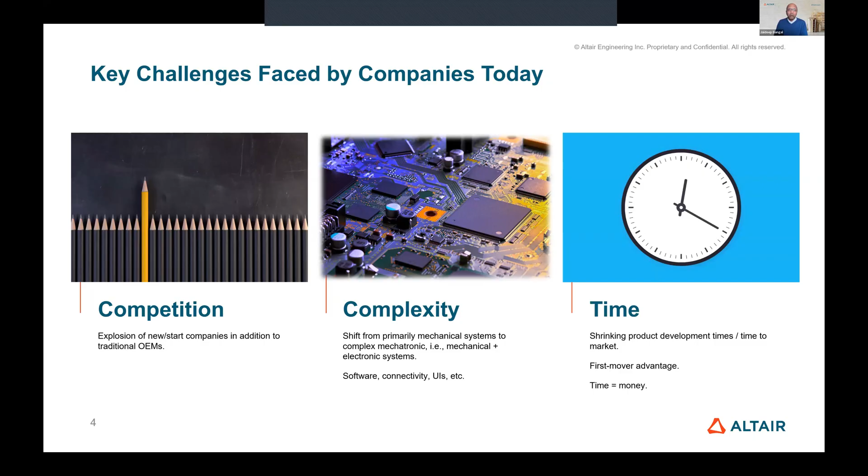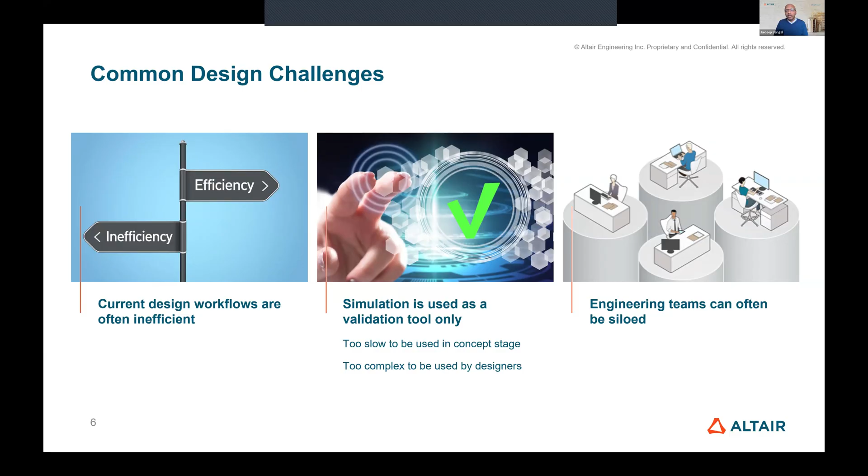Now, saying that, even the engineers face challenges. Maybe it's a design challenge, maybe it's efficiency for the design. What about simulation? When to use the simulation tools? Should I use it early in the design phase? Should I use it in the mid, or at the end of the design or product development cycle? Many engineering companies are implementing simulation tools very late. The design engineers design the part, then send it over to the CAE engineers, manufacturing engineers, to see if they can make it. They send the report back saying make those 5 changes. Is it efficient? It's not. And that's where, can I make these tools available for the design engineers, mechanical engineers, to be used very early in the design phase? That's becoming very important.

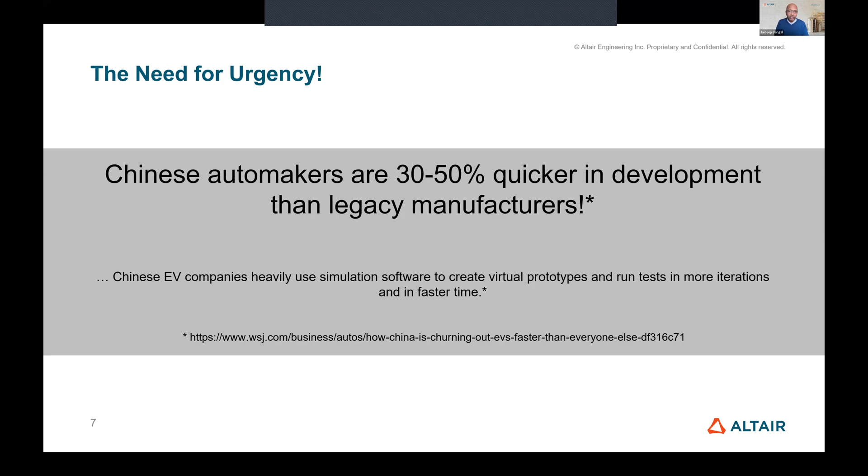Now think about this. This is a report from the Wall Street Journal, WSJ. Chinese car companies are 30 to 50% quicker, and they're becoming a threat to a lot of automotive companies here in the Americas or Europe. I mean, they're doing the right things. But a lot of those companies are our customers. We are helping them to move faster. The way they are moving faster is implementing these design tools, AI tools, manufacturing solutions very early, to predict the failures and fix those failures during the design phase.

Another example on the manufacturing side is this tool company from Asia. They were able to predict casting failures, manufacturing failures very early. They're saving almost 80% of their time, the product development cycle time and the manufacturing time.

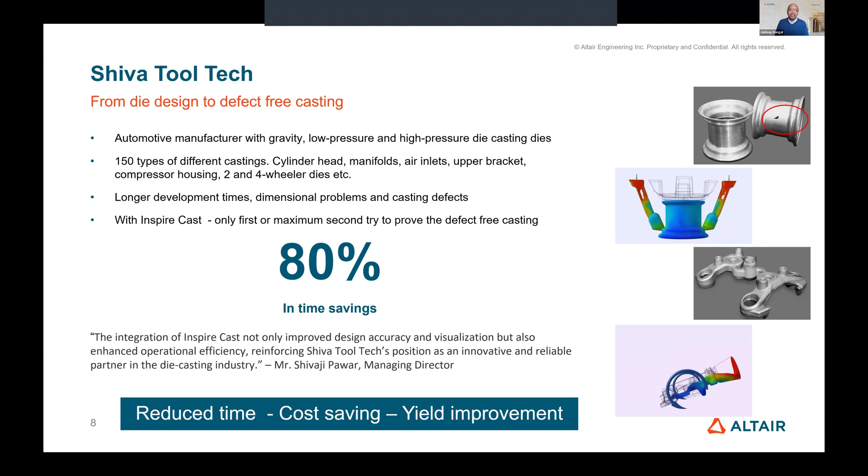This is another example from an aerospace company who wanted to redesign their part, make it lightweight, use different materials. They wanted to use a different manufacturing process, but because it has to go through FAA regulations, they cannot just change the manufacturing process or use a totally different material. So what to do? They implemented topology optimization based on the loads, loading conditions, worst case scenarios, and then they 3D printed the sand mold for this part, which they eventually cast. So they're using the best from both worlds, 3D printing and optimization, to come up with a lightweight design, but also using this traditional manufacturing process, which is proven and goes through the regulations very quickly. So with just that one part, they were able to save 3 pounds, and that's about a 65% reduction in mass.

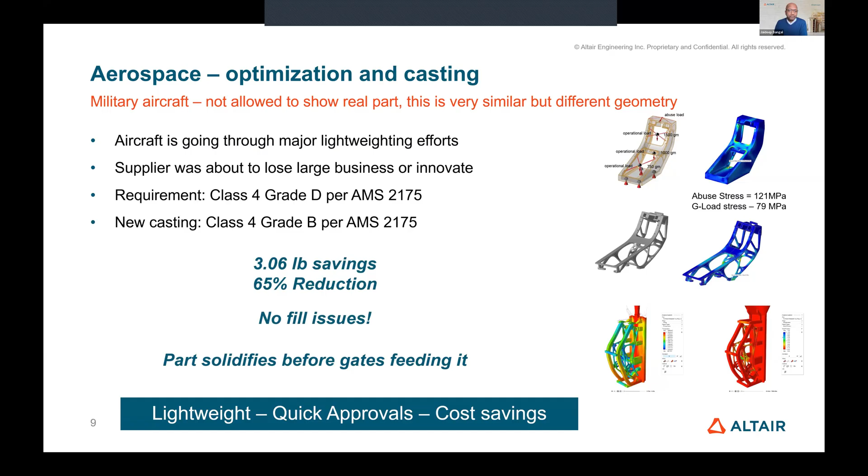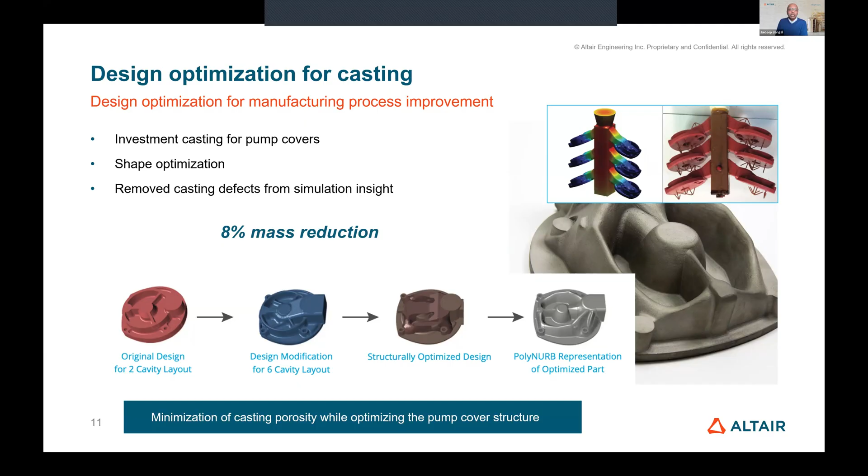Another example, maybe the last example I want to show, but I'm going to tell you now so you can get the crux of the story. It's also important to design the part for a manufacturing process. It's not just finding the defects during manufacturing, but can I predict those defects at the manufacturing level, and can I make design changes or process changes to get a successful manufacturable part. This particular design was an 8% mass reduction.

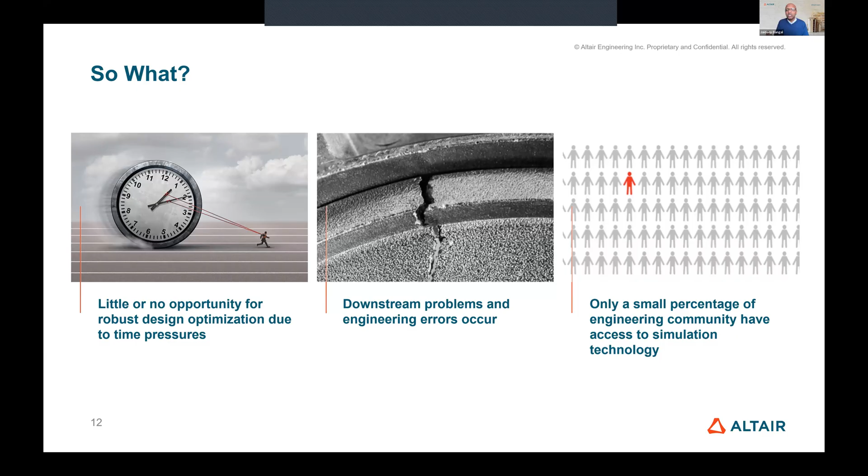But the question I always get is: all right, that looks good on paper, in a PowerPoint presentation. So what, right? My applications, my designs are different. So what we can do is start to dive deep into how it works, find the downstream problems very early. Maybe change one component, maybe start by changing one process element, and see if that benefits your application.

So what is design for manufacturing, or design to manufacturing? It's a solution. If I'm an engineer, there are two ways engineers design a part. Designing from scratch with a napkin sketch: where the forces are, where the loads are, this is my area where I want to design. The second method is very common: it's carry-over design. That design has been there for a long time, and I want to make design changes now, maybe use a different material or a different manufacturing process.

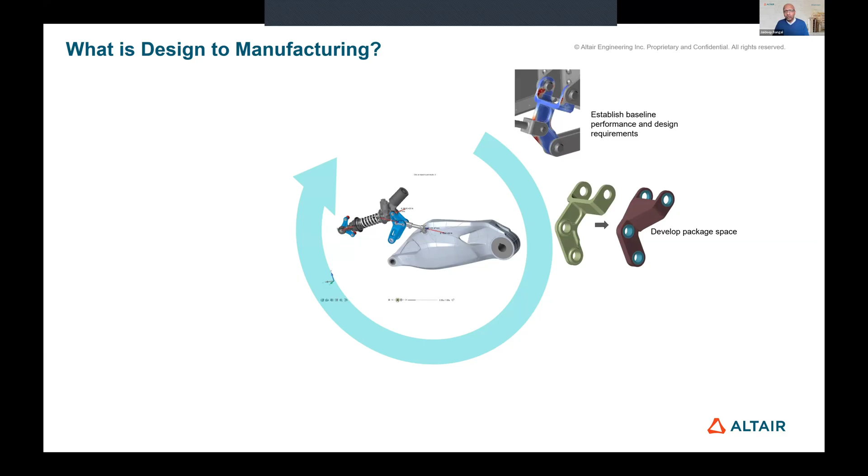So I always start with how this existing part behaves today, right? I'm going to run a quick baseline simulation. From there, I will start with the largest possible design space, the packaging space available for engineers. And then from the given loads, which can automatically be calculated or populated as load cases from a kinematic motion simulation, which you see on the screen. It's a simple motion simulation with springs and hydraulics, and this is the bracket for the Ducati Superbike. Those moments and forces are calculated on joints, pins, and force locations, and I'm going to use those as my load cases. And the tool comes up with the most optimal solution.

This is where the material needs to be, right? That's what the tool is telling me. But how am I going to manufacture this? Is it manufacturable? Maybe machining, maybe 3D printing. But even with 3D printing, it's not that easy to make that particular design we see on the screen.

At that point, we force the tool to come up with a design which is manufacturable. Maybe it's different manufacturing processes: injection molding, machining, a 5-axis mill, a 3-axis mill. Maybe it's additive manufacturing. Maybe it's casting, single draw, split draw. Maybe it's a stamped component. And depending on the manufacturing process or multiple processes I select, the tool will come up with the design, which is for casting in this particular case.

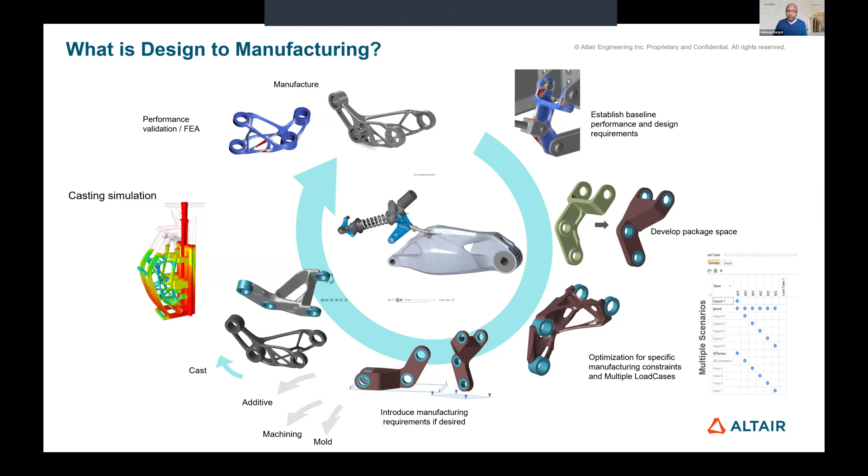But many times as engineers, we work in bits and pieces. So it's totally okay to run optimization separately, or manufacturing simulation separately, or the FE analysis separately. You can bring in the part from somewhere else and just run the manufacturing simulation to check what will happen if I make this part. So this is, in an ideal world, the entire end-to-end solution, which can be used in bits and pieces.

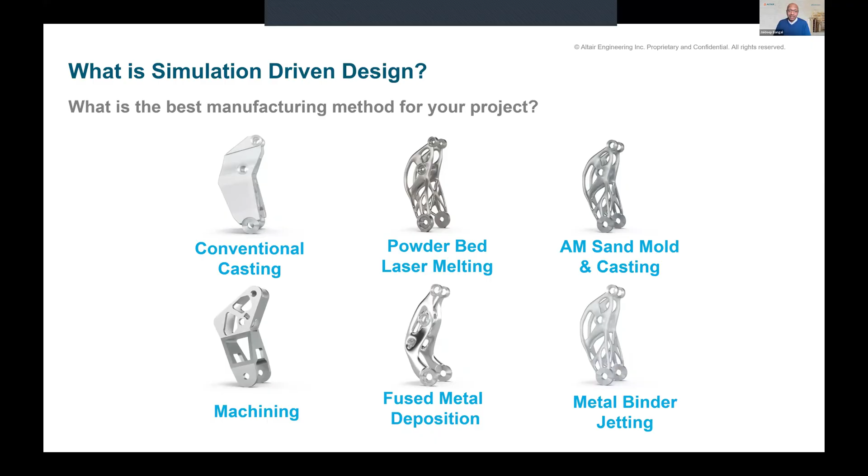So this is a good example of what smart design is, right? What is simulation-driven design? The same exact bracket designed for different manufacturing processes, from conventional single draw casting to powder bed laser melting with additive manufacturing, or maybe a hybrid method where I get the sand mold 3D printed and use casting as the manufacturing process, or I can go with machining, right? A 3-axis, 5-axis, or 9-axis mill, and come up with a design. So the same bracket can be designed and its manufacturability checked within a single solution.

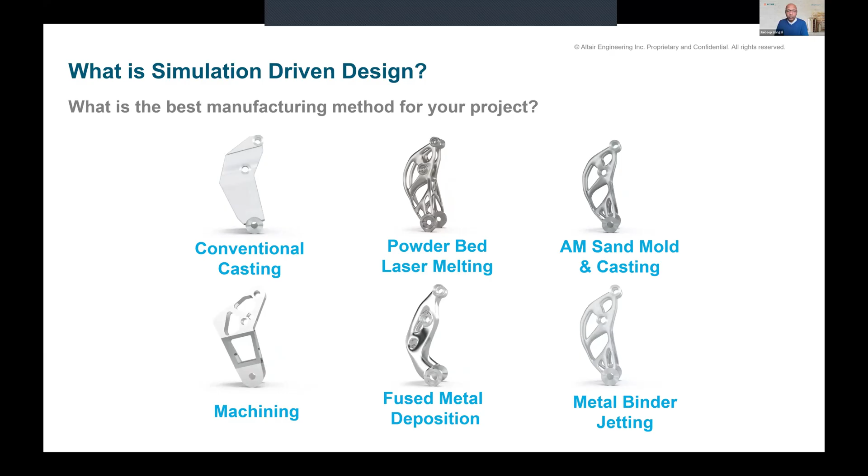To achieve that, there are different manufacturing simulation techniques or solutions, from metal casting, metal forming, injection molding, extrusion, both for metal and polymer, additive manufacturing, and polyurethane foaming. Again, these are for design engineers, mechanical engineers to be used very early in the design product development phase.

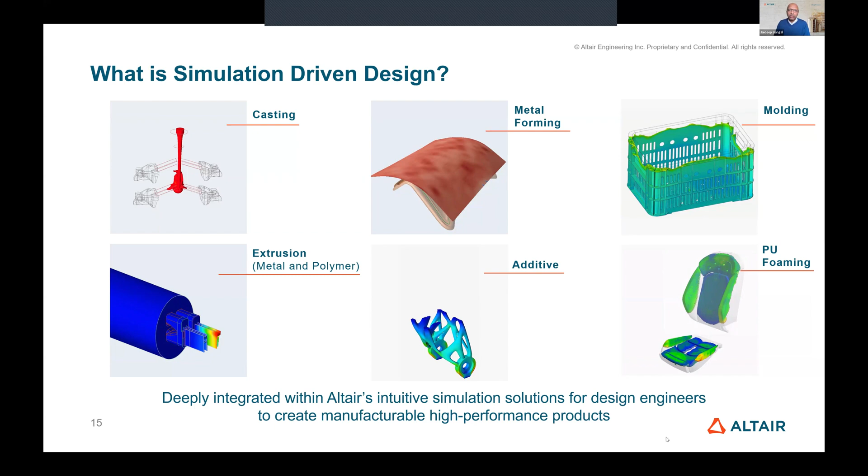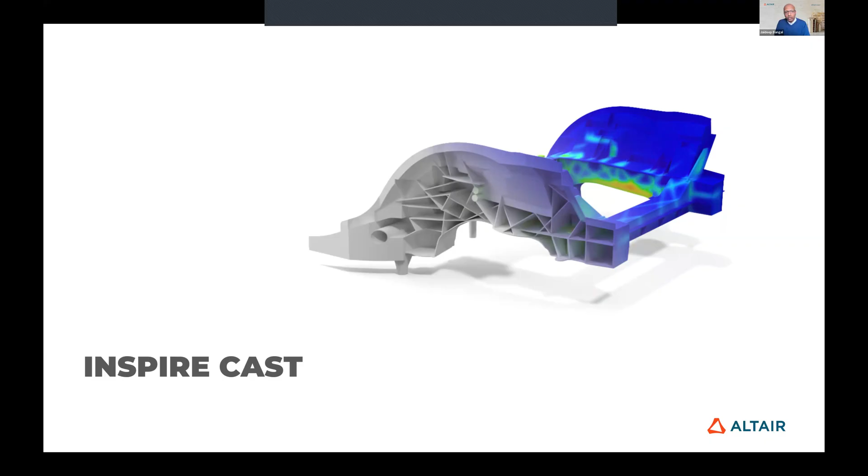Now, I'm going to start diving a little bit deeper into the discussion today on manufacturing solutions. Until now, we saw how design optimization, topology optimization can come up with designs which are manufacturable. But what are these manufacturing feasibility tools? Let's start diving into Inspire Cast, which is our casting solution. It's a complete casting solution from filling analysis to cooling, cycling, and warpage. It is temperature coupled.

That means we are running both flow for the molten metal and the temperature for the entire system. It can be die, it can be tooling, and it also can have the cooling lines you can see on the screen. I think there's a video. Let's play that video. And when it comes to the cooling or the solidification part, Inspire will start coming up with the results for the porosities, hotspots. We can run the tooling analysis. We can run the cooling optimization. At the end, when we run the warpage analysis, it can come up with the deformation and the residual stresses, which, by the way, can be used for structural analysis.

So as an engineer, I also want to know, if I manufacture this part and use it in my final assemblies, how it is going to perform, what kind of material properties I will get. So we can export these deformation or residual stress results for structural analysis. Many of our companies do this for crash or drop tests to see how this cast part will perform in the real assembly.

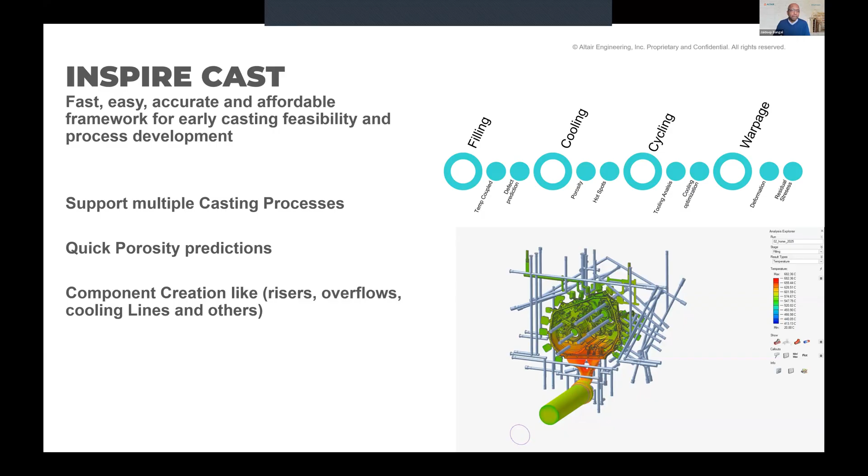So there are two ways the casting solution is being used. One is very early by the designers during the product development phase, coming up with the design in a few minutes, a few seconds rather. I want to find out the porosities. I want a quick preview of where the porosity will be. I want to run a quick thickness analysis. The rib structure: you have 1 millimeter, 2 millimeter ribs. What will happen? Or the draft angles for the mold opening. 1 or 3 degrees are very common draft angles in the casting world. We can run quick analysis on those.

At the later stage, we can run a complete CAE or manufacturing simulation for the entire part, where we can start adding more components in the casting process, such as cores, chills, risers, sleeves, overflows, and all that stuff. Or you can bring all those parts from an external setup as well. So you're working with the foundry, and they have all this setup done for your parts, but you want to really quickly check what will happen when we actually start pouring the metal.

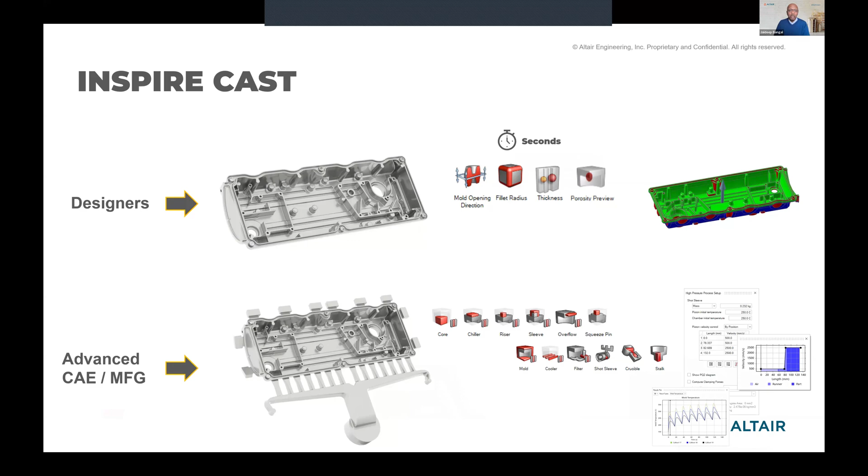So before we actually start spending time on the tools, dies, and metal on the foundry side, we can identify the problems. On the design side, these are the very typical workflow processes. You can see the porosity preview; that's where we can identify the areas where the porosity might be.

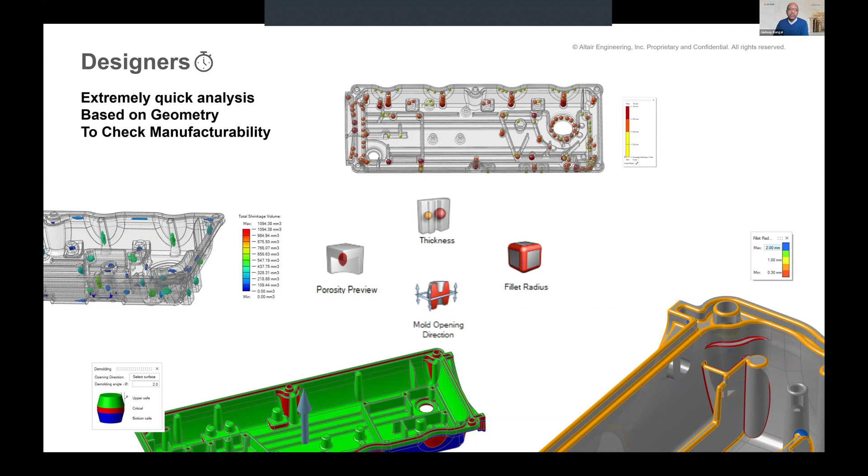So there are two options as a design engineer. I can go back, make design changes to take that porosity out of the part or avoid the porosity, or I can start using, for example, risers to take that porosity out of the part.

On the advanced analysis side, there are four different processes that Inspire Cast supports: HPDC, high pressure die casting, low pressure die casting, gravity, tilt pouring, sand casting, investment casting. These are the very typical casting processes.

You don't have to be the expert in casting, or a manufacturing person all the time, to use these tools. It's a very easy to use tool. If you happen to use Inspire, you can watch some videos for 2 hours or half a day, or go through a quick training session online and start using these two solutions.

I think the most difficult part for anyone is understanding some of these results and implementing them back into their own design, and that's where Team D3 and we as Altair can come into the picture, kind of hold your hands, help you, and go through your first few projects.

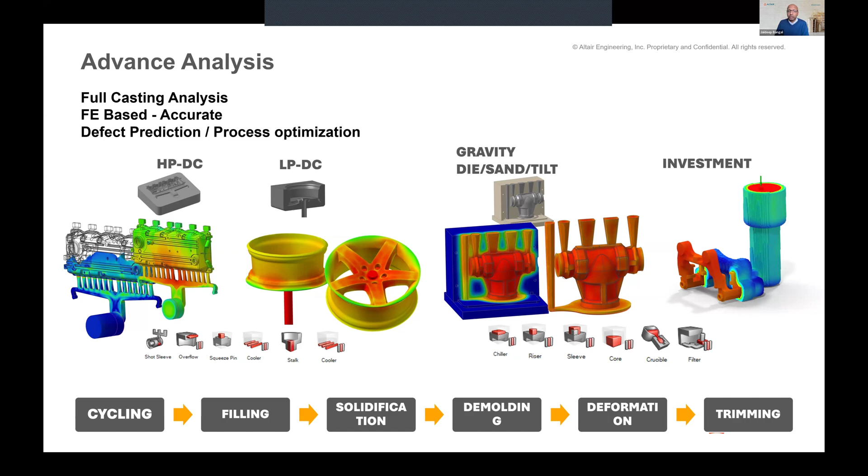Now, the second part is Inspire Mold, which is our injection molding tool. It's a complete injection molding tool based on the Inspire platform. Again, it does a filling, packing, cooling, and warpage analysis. For the filling, we can identify the flow patterns. You can get the temperature flow front for the part.

Once you start packing, find out the sink marks, right? Or in the cooling solidification part, find out the weld lines of the mold, or the cycle analysis for the mold. And at the end, use the complete warpage analysis with fibers to understand the deformation. And again, we can take this data back to the structural analysis if we need the material properties.

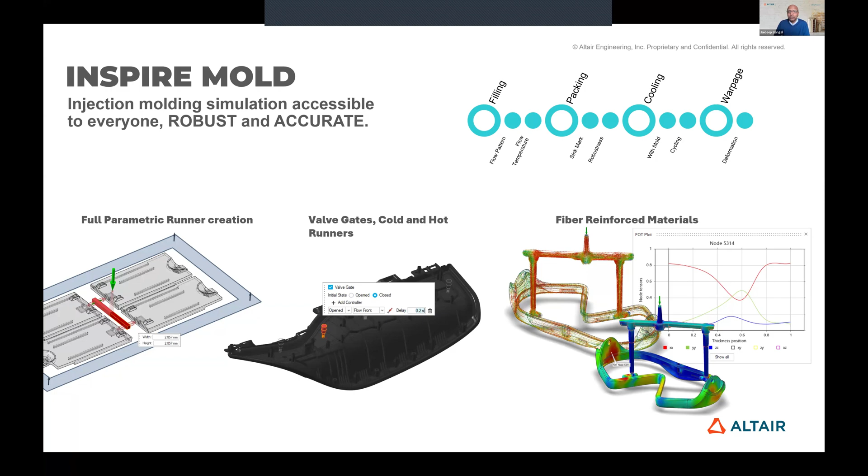Now, it's what we call a hybrid solver. It runs super fast. The way the solver is based, it needs very little mesh. As engineers, I don't want to spend time setting up or meshing these parts. I want to take my part, set it up as quickly as possible, run the simulation and try to understand what these simulations mean, what these red colors or blue colors are telling me. That's where I want to spend more and more of my time, right?

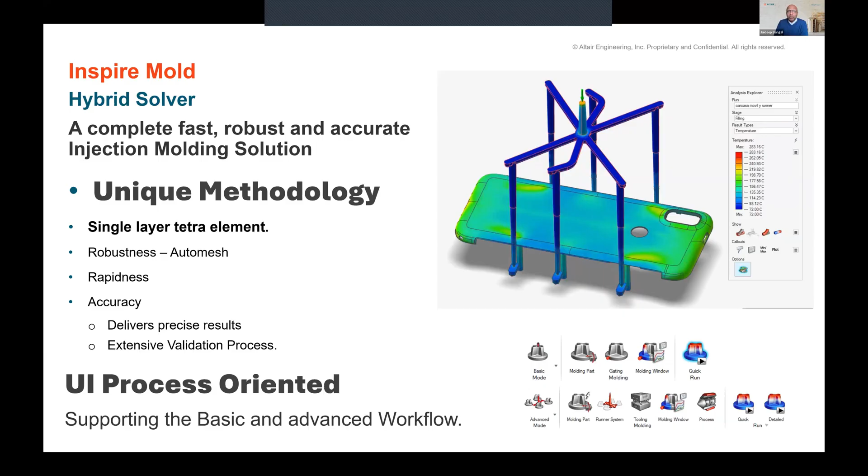So we have complete automation done for the injection molding. It's very fast and it's very accurate. Now, there are two modes even in Inspire Mold. As you can see, there's a basic mode for design engineers to quickly run simulations, or once the design is finalized, go to the next step with the advanced mode, where you can start adding more and more components. For example, runner systems or tooling, quickly check the molding window, or start adding more process parameters and run the complete detailed simulation from filling, cooling, warpage analysis with fibers on my part.

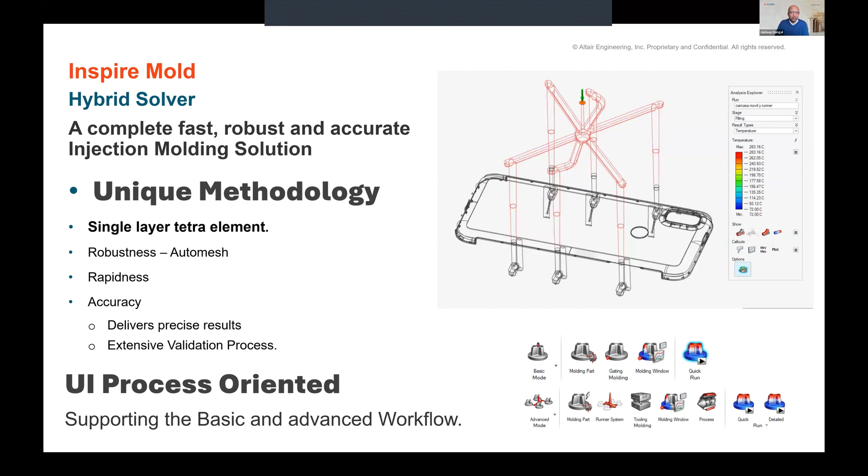So you can see it depends. The same engineer, same designer can be using these tools either very early or once the part is finalized. The same exact tool works in both ways. And another thing you can notice: from Inspire Cast to Inspire Mold, the workflow looks very much the same, from the icons to the buttons. So the learning curve is very short for all these manufacturing solutions.

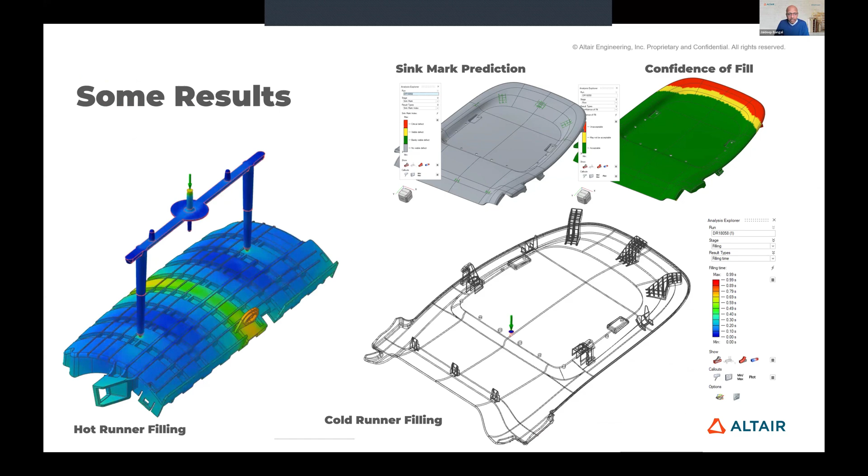Now, to quickly show some of the results that we can get from the injection molding analysis, we can go into the hot runner filling system, cold runner filling system, get the sink mark predictions, and confidence level for the fill. It goes from 0 to 1, and that's the level. Imagine it like a percentage level. 1 is good, but about 0 is bad.

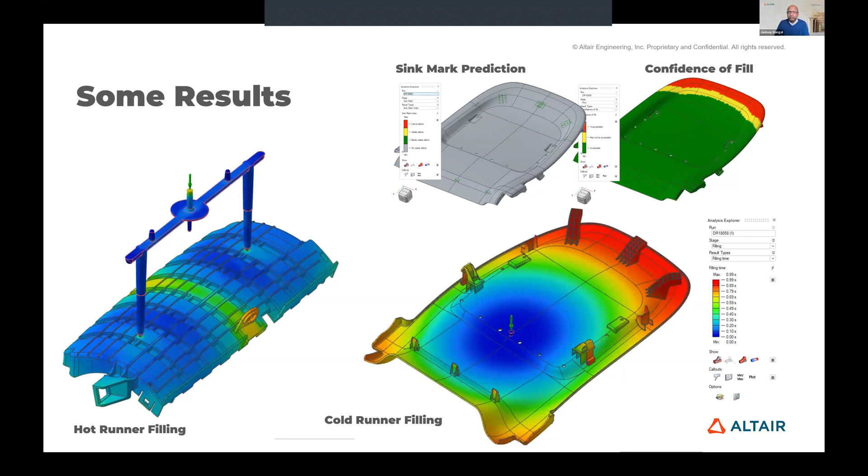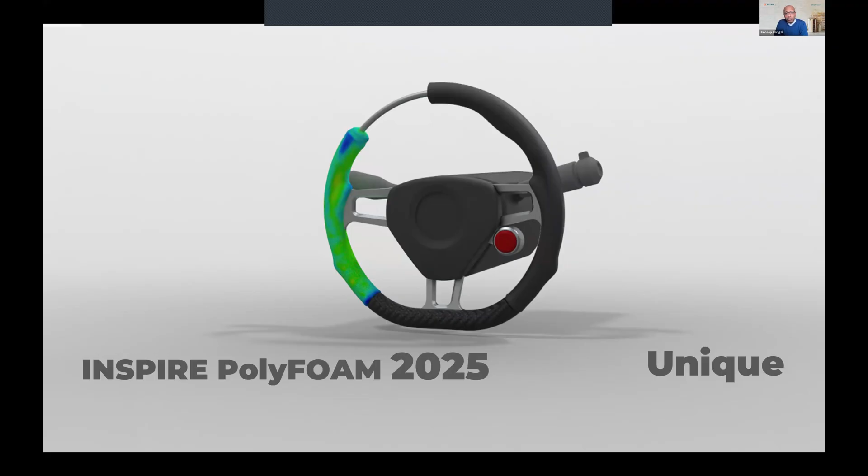Now, the next tool I want to talk a little bit about is Inspire PolyFoam. We all use cars, right? We sit in our driver's seat and it feels nice and comfortable in our own kingdom. Those car seats, and we hold steering wheels. We have a nice dashboard in the front. We have nice side panels on our doors. Those are all made from polyurethane foam, and that's what we interact with daily.

Now let's take the example of the car seat I mentioned. Right, the car seat has multiple purposes. Of course, comfort for the driver and passengers in the car, but it's also for safety. In case of a crash or a side impact, it has to absorb some of that energy.

Right, now the polyurethane foam acts as a cushioning, or the foam in that effect, in those cases. So we can predict all that analysis. Now, the way the polyurethane foam works, let me give another example, very easy to understand. In our homes, we have an insulation material between the walls. We spray this polyurethane liquid and then it kind of solidifies in a few minutes or a few seconds, right?

That is polyurethane foam. Now, the most important part, you don't want to spray too much, otherwise you'll start getting bulging in some areas. You don't want to have air pockets in those. You don't want to put too little as well, because otherwise you get pockets and bad insulation in that case. That's exactly what this polyurethane foaming simulation does. A complete filling, foaming, and curing analysis. Many components in the car, many components in refrigeration units are using this.

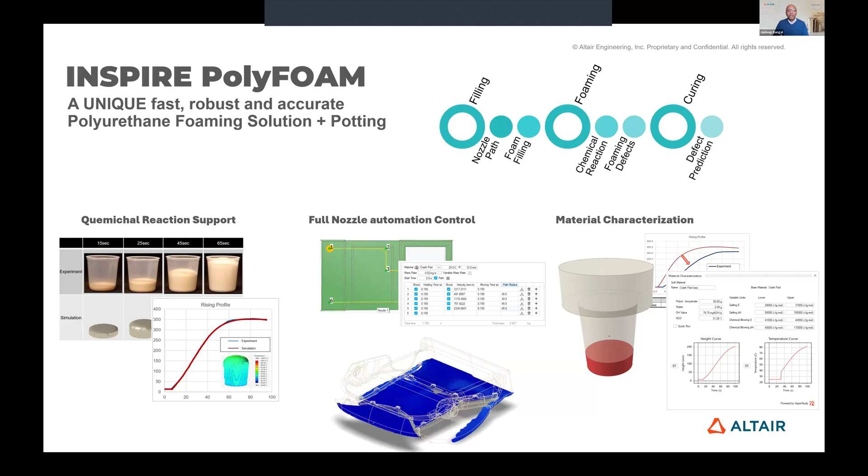The next application is electronics. In the electronics world, they call it potting analysis. You are adding some material on the electronics assembly components over the PCB board, so it doesn't shake. Good insulation. We can also simulate that entire component.

Another part of that is material characterization. The way the materials are built for polyurethane is mixing two different chemicals. That entire process can be simulated using AI tools within the tool. In the past, someone had to go to the lab, mix the materials, try it out, and see if it works. Now that process can be automated using this AI-based material characterization tool as a part of the polyurethane solution.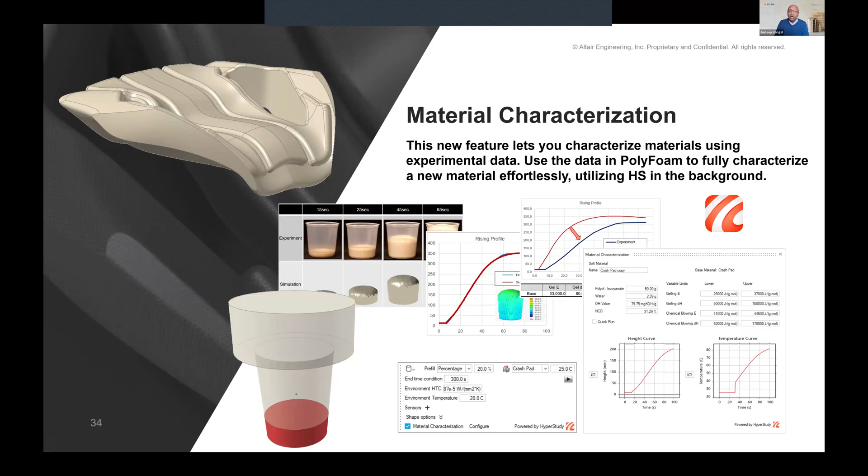A few examples where it is being used. As you can see, refrigerators are a really good application to start with. All the insulations, I would say 9 out of 10 refrigerator companies are using polyurethane foam, Inspire PolyFoam, as their tool for the solution. PCB potting is another area for the polyurethane foaming solution.

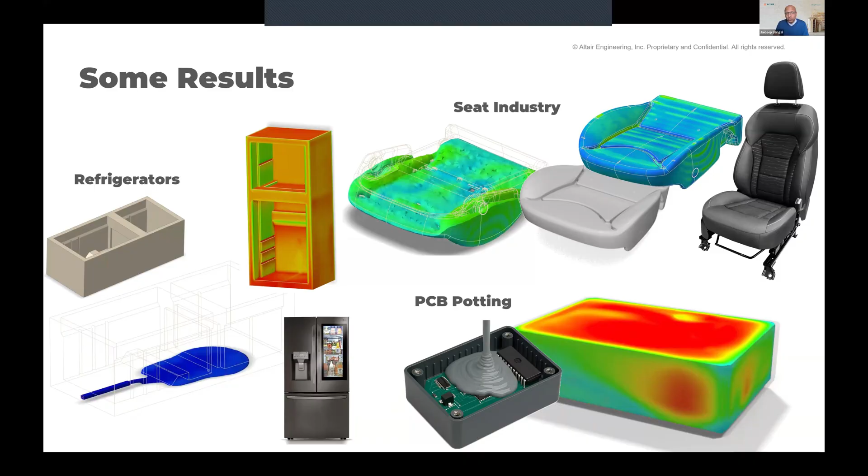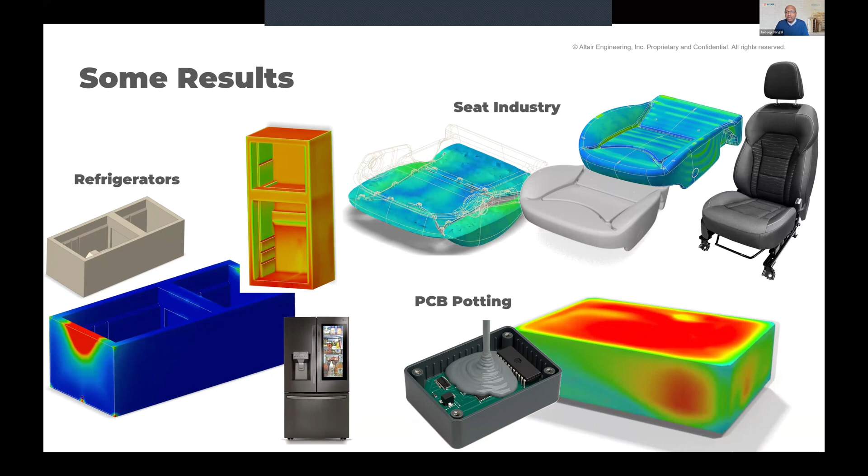You can see you put the potting material in, it solidifies, it rises. Now, the most important part is you don't want to add too much or too little. Too much means you're going to create a lot of stress on the components. How much material to add, where to add that material, how to spray that material can all be simulated using a polyurethane foaming solution. Same thing in the seat industry, right? Or the automotive industry is important for that part.

The next tool I want to talk about is Inspire Form. It's our complete metal forming simulation tool, from feasibility analysis to die design to tryout. When we talk about feasibility, that is very early design. As a design engineer, I have a component in mind I want to manufacture with stamping, right? I can run a quick feasibility simulation, we call it one step simulation, a couple of button clicks, and it will come up with the analysis for the formability defects.

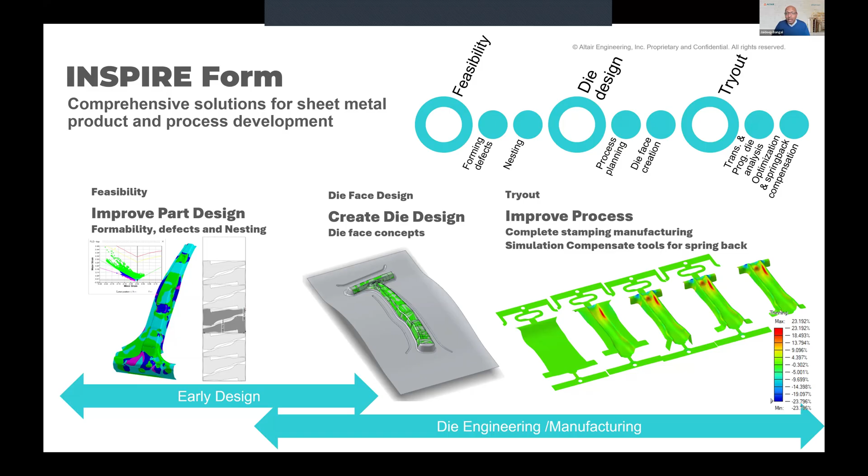We can try the nesting, and then we can go to the next steps, adding a little more complexity to the setup, from creating a die design to understand the springback, or you want to improve the process parameters for the tryout with complete progressive dies, optimization, or compensation. With compensation, at the end of the process we may get a deformed part. How can we avoid the deformation? Can I pre-compensate that part?

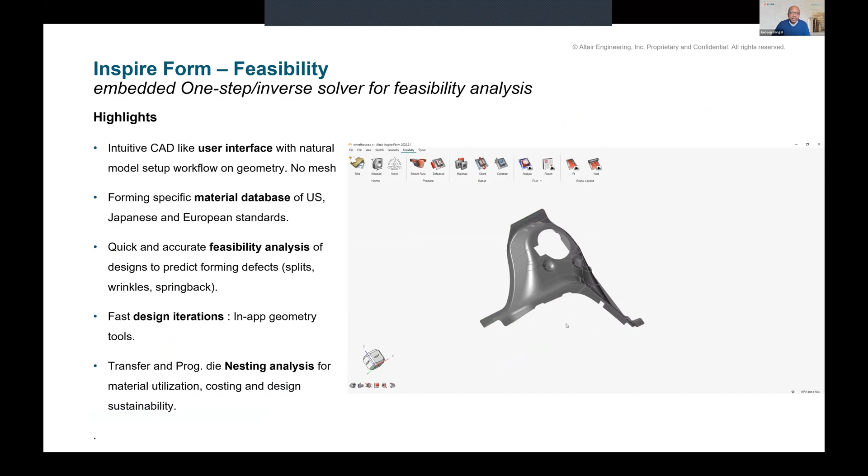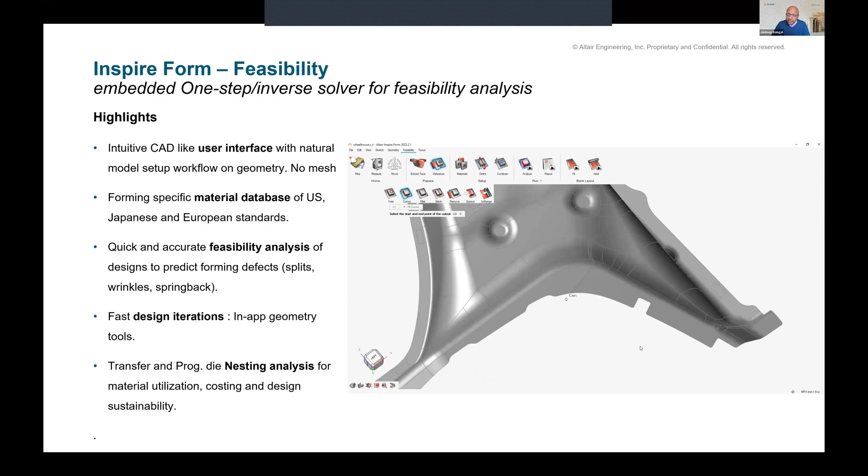This is a good example of one step or the feasibility check. I have this component. I'm just selecting the different surfaces on that component, also defining my typical holes, or just cleaning up the geometries. There are different geometry cleanup tools within the Inspire portfolio. It's not a CAD tool, but it has CAD-like features which can be used to modify the geometry

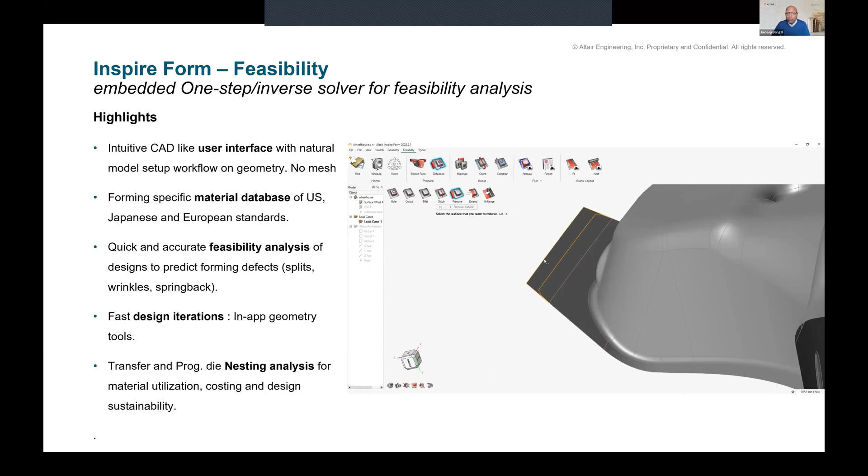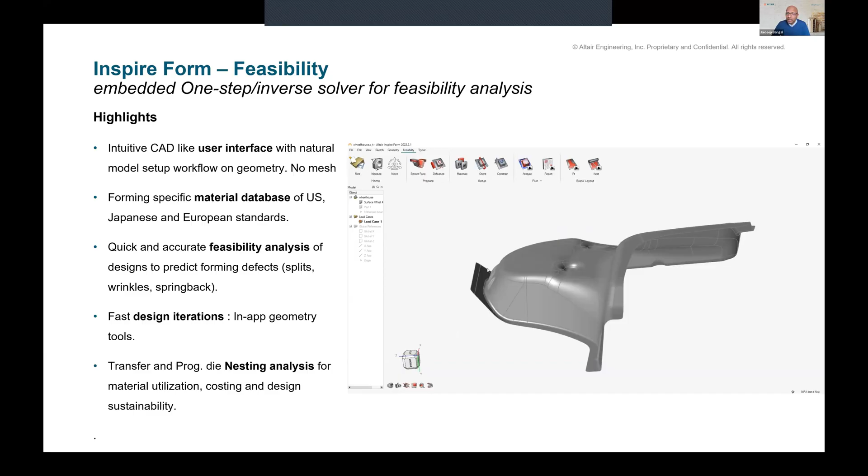or run some DOE analysis. Quickly check, I have a hole from 1 millimeter to 10 millimeters. What's the best shape or size for that hole, depending on my design criteria? That entire study can be run in the background using Inspire DOE studies.

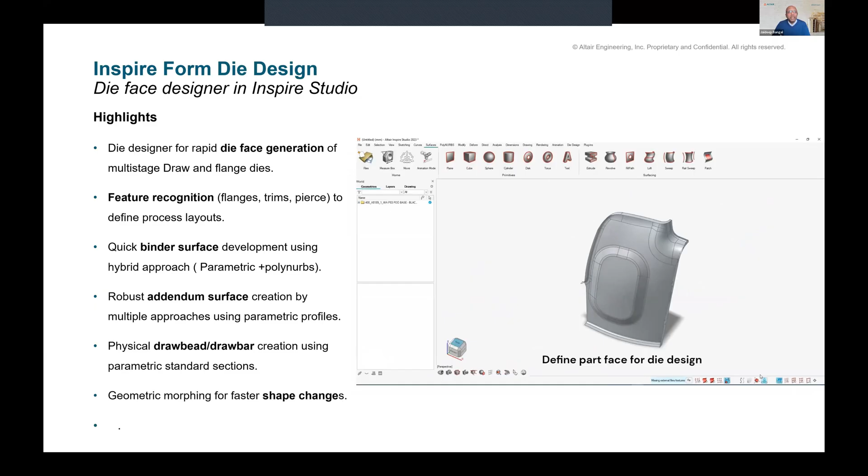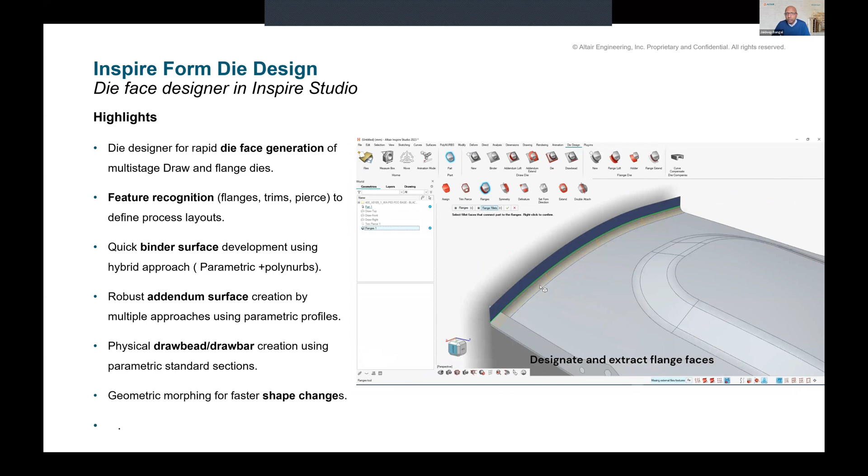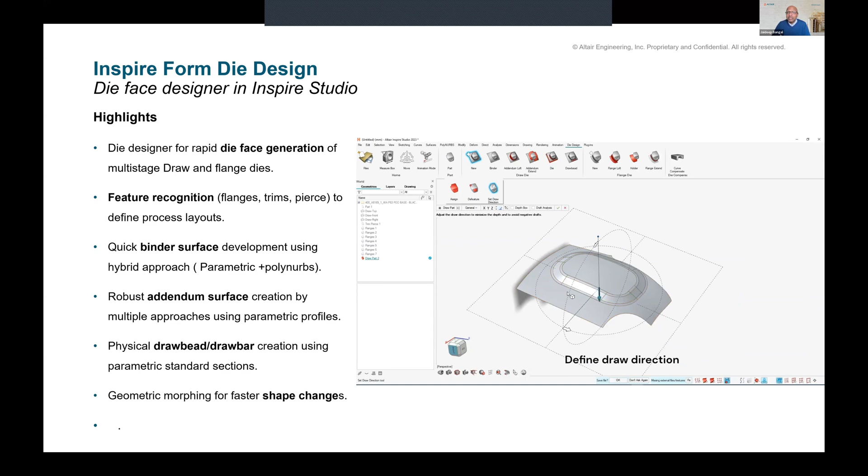The next step is my complete die face design, where we have a component. Now I'm assigning the die design component. So we're defining the trim faces here. We define the flanges. If there's a symmetry, we can take advantage of the symmetry of the part, not in this particular case. And then we need to defeature some of the holes or the rivets or the chamfers. We can remove those faces. And finally, we can start setting up the die for the die design.

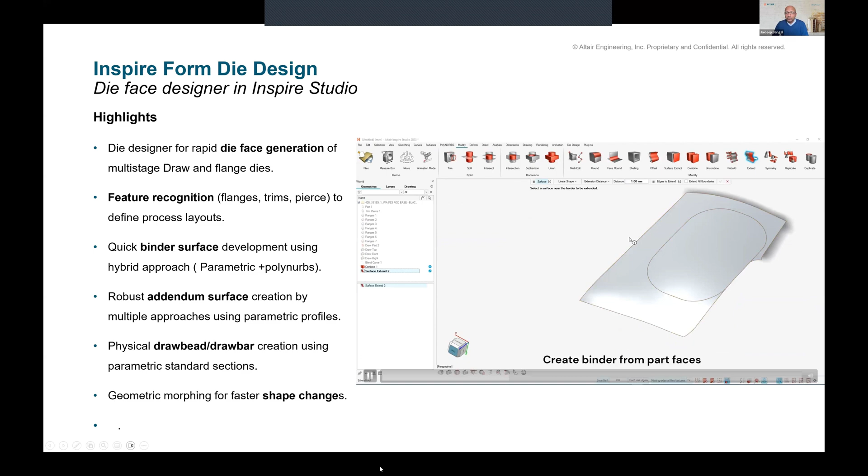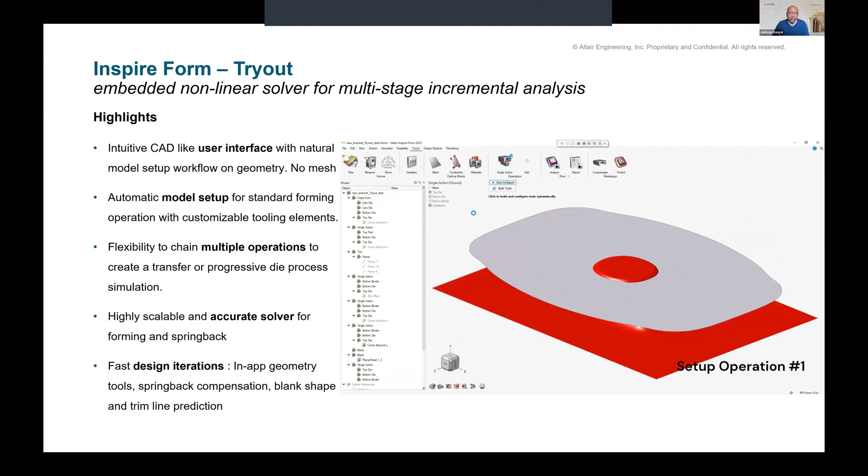The next step is a complete tryout, setting up the entire setup for my progressive die. Starting with, again, you can see from the user interface, it's a left to right or top down approach. Start with the blank phase. We define the blanks, we define the constraint, define materials, and then it's a single action or multiple action die, and we start adding more and more of those process parameters for the simulation.

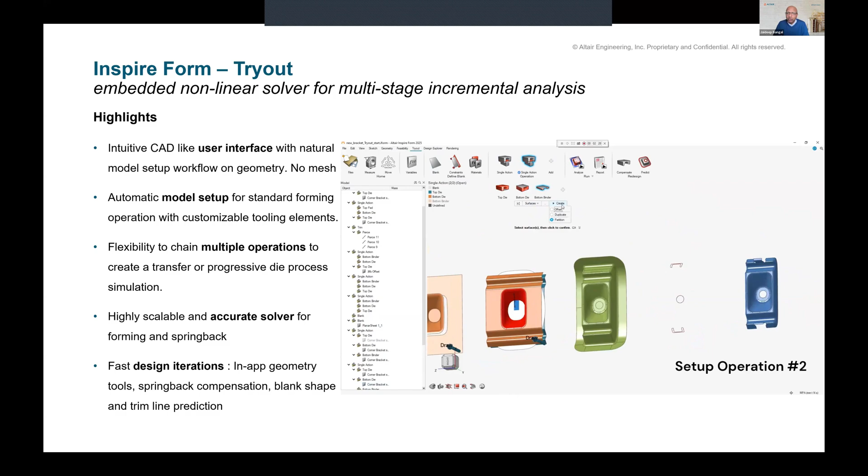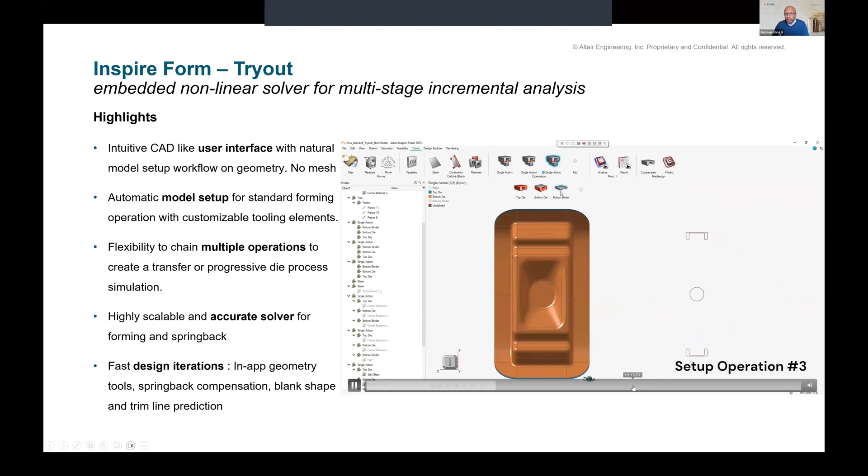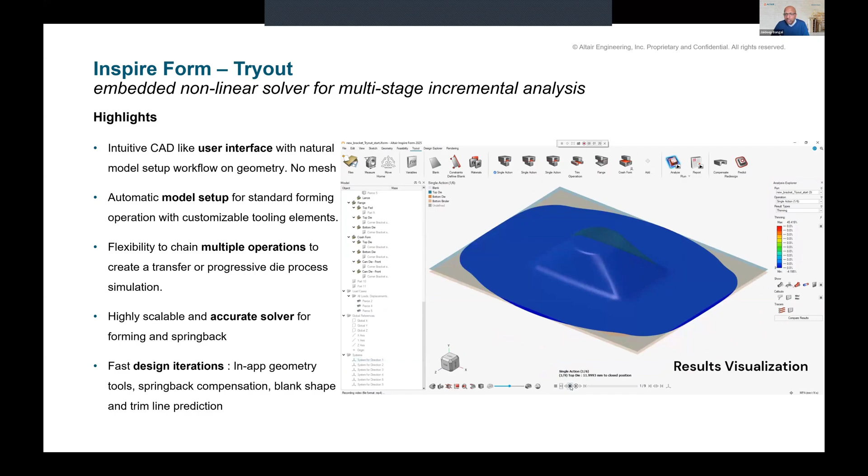Make it run a little bit faster. Once my die is set up, I can quickly run analysis. Now look, getting into the result visualization. It's a single action die I set up, so we can look into the formability, the thinning, the wrinkles. If you want to find out, all that we can find out using Inspire Form.

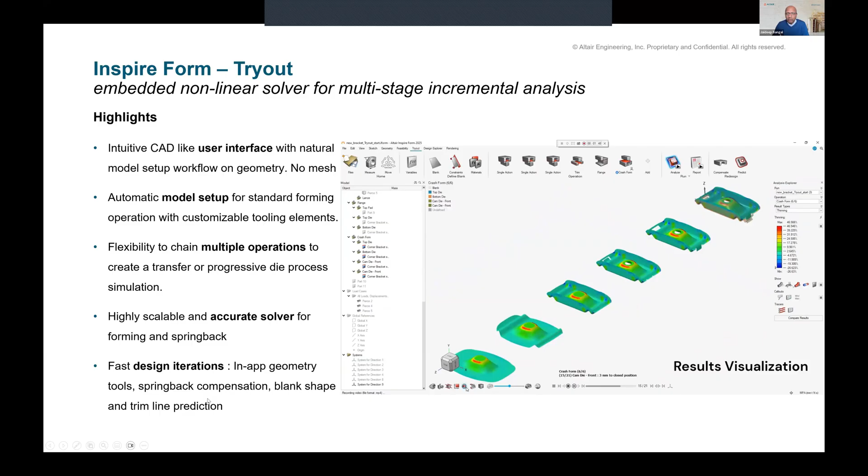Now, another reason why we call Inspire a platform, and all these tools are part of the Inspire platform, is it's not just running one particular design or coming up with a design or manufacturing, right? It has to be kind of a connected workflow. So imagine this is my oil pan. I start with the topography optimization, right? It's still a sheet metal part.

So I want to find out what rib structure I can use, and it depends on my loads, in this case oil pan, or it can be modal analysis. The tool will tell me how the rib structure should look. And from there, I come up with the most optimal design and run a quick feasibility check for the oil pan. And once I'm satisfied with the design, I go to the next level of creating the actual die using the Inspire Die Designer.

From there, I can run a complete tryout simulation on my oil pan, FLD plots, time history plots, thinning. If I'm happy with it, now I go to the next step where I'm actually working on the die side. This die will be cast, so I can run a quick casting simulation on my die to see what kind of densities I will get, if I'm going to get porosities or defects on my die design. And if there are, in this case, I use 3 risers to take the porosity out of my die, which is manufacturable.

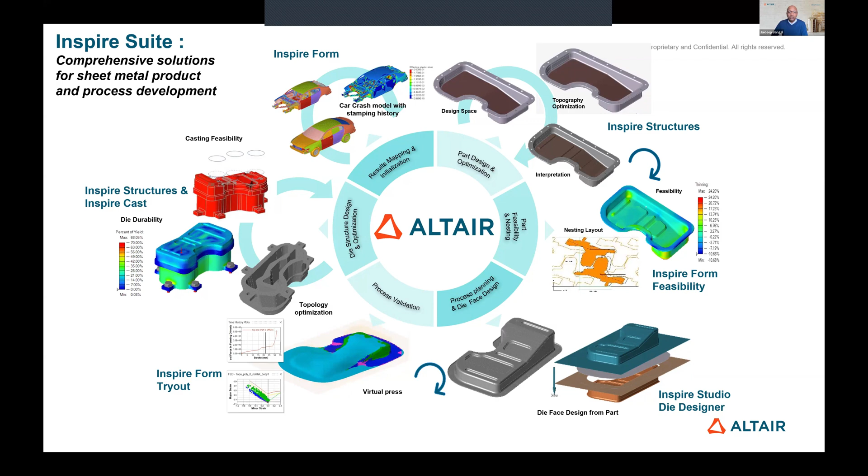And finally, take the designs for the next step of the entire simulation. For this oil pan, I want to put that into my car model for the crash analysis. And we can export that data for structural analysis, crash analysis. In this case, it can be Radioss or OptiStruct, which is another set of Altair solutions.

The next one I want to talk about is Inspire Extrude. It's the metal extrusion and the polymer extrusion process. On the metal extrude side, there are simulations to predict or analyze the nose cone. It can be both steady state as well as transient analysis. We can learn about the die filling. It can be single cycle, multiple cycle solutions. It can also run the stress analysis for the tools.

There's a solution called SimSolid. It's a meshless technology that we implemented within Inspire. So with very complex geometries and forms, you still don't have to mesh them to run structural analysis on those parts. The next is a quenching analysis, run for the part. It can be elastoplastic analysis. We can work on the grain size or the quench factor for the quenching simulation.

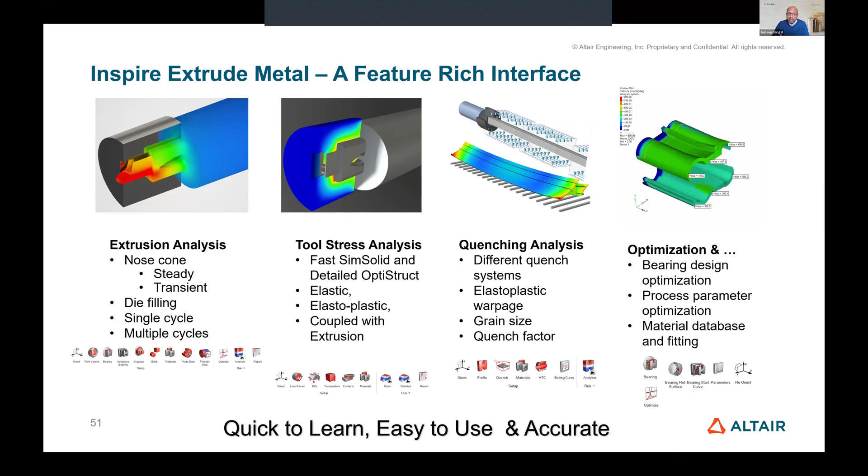And finally, optimization: the die optimization or the bearing design optimization can be done as a part of the metal extrude simulation. I think let's go back and talk about some of the applications, the defects that it can predict. It can predict the profile distortion, unbalanced bearing wear, die wear.

It can also detect the weld defects when you get this kind of unmatched flow for the material coming out of the die. It can find the seam weld issues. It can predict the grain structure, overheating and the profile quality at the end. It's the surface quality prediction. We can export the complete report of the die in this particular case.

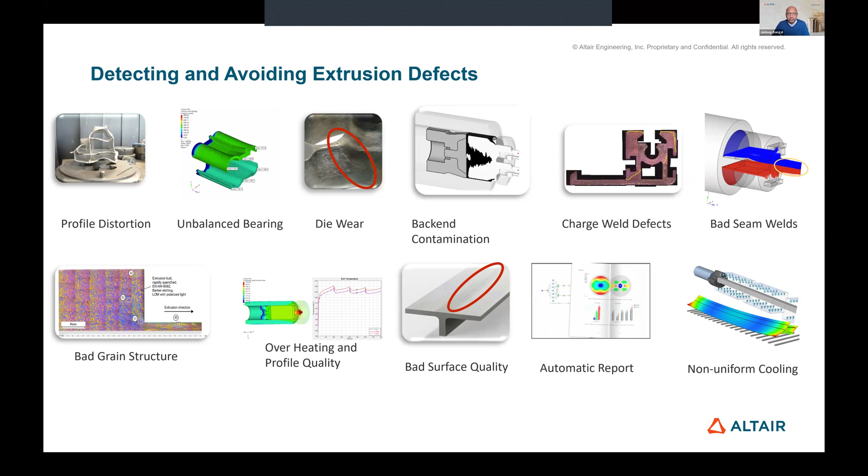The next one is polymer, for Inspire Extrude for polymer extrusion. Very similarly, it runs the analysis for single profile extrusion, co-extrusion, and it can have inserts for the prediction. Now on the prediction side, we're talking about the swelling effects, profile distortion. You can look at the material interface, very similar to metal, where we talk about weld seam lines. And also do the pressure or temperature residence time analysis, which can be exported for the structural analysis.

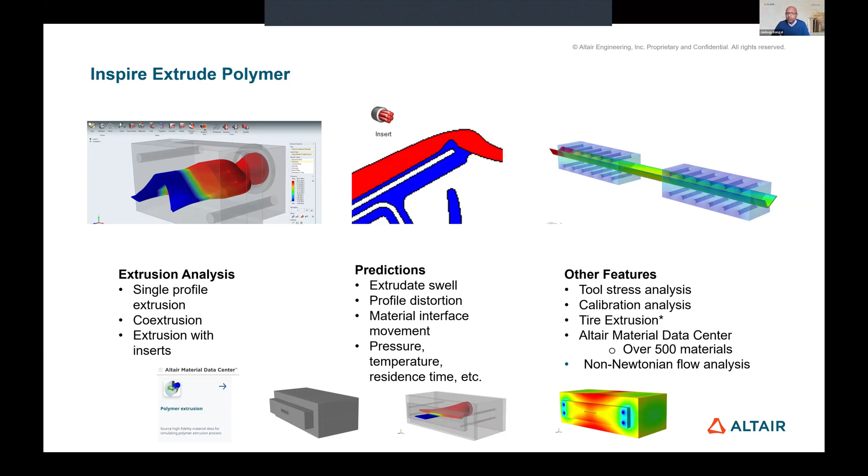All right. Now, this is all great, right? We talked about Inspire Cast for casting simulation, Inspire Mold for injection molding simulation, Inspire Form for stamping and forming analysis, Inspire Extrude for our metal and polymer extrusion. One thing I also want to add is AI in the simulation tools, AI in manufacturing simulation.

So as engineers or manufacturing teams, we have a tremendous amount of data that has been generated over time, from sensors or maybe manufacturing simulations. Can I use this data to train AI models and predict the analysis, predict the failures just using AI tools? Absolutely yes, and that's what a lot of companies have started doing, exploring areas where the historical data from simulation is fed into Inspire, with physics AI as the tool name.

It trains the tool, and next time you have design changes or a component comes in, you can use that trained model to predict the simulation, predict the failures. Now, in this case, imagine you don't have to run anything. You don't have to run meshing. You don't have to run actual analysis. You're running just the AI in the background. The time saving is tremendous.

Here, with a traditional analysis, we run 3 hour, 4 hour simulation runs, creating mesh in the background and all that. With the physics AI tools, we can predict the same exact details within like 30 seconds. So it's super fast, super accurate, and it's a time saver. So if you haven't used it or explored it, I will definitely recommend using some of these physics AI solutions for any manufacturing process.

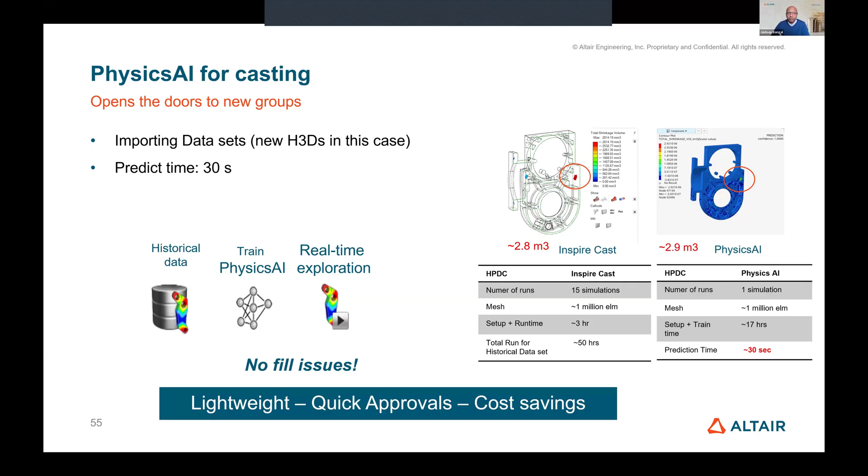So now, four takeaways from my presentation today: empower yourself. The tools are there, the solutions for designing and manufacturing are available. Use them to come up with designs which are manufacturable. Optimize very early. Use these generative design, generative AI tools very early while you are designing the part to predict the failures for manufacturing, for analysis, and work on those. Maybe it's as simple as changing the rib thickness, and all your manufacturing problems will go away. Use these AI tools that are available for those predictions.

Now, what I always say to my engineers is constantly track cost and performance, right? We go back and forth on a particular design, a particular manufacturing iteration. Maybe it's time, but time is money. I think I gave an example earlier of one of the automotive companies trying to reduce their production cycle from 3 years to 15 months. Right? And it cannot happen overnight. It has to be done using smart engineering tools, from designing to manufacturing, and that's exactly what these tools help you do to innovate.